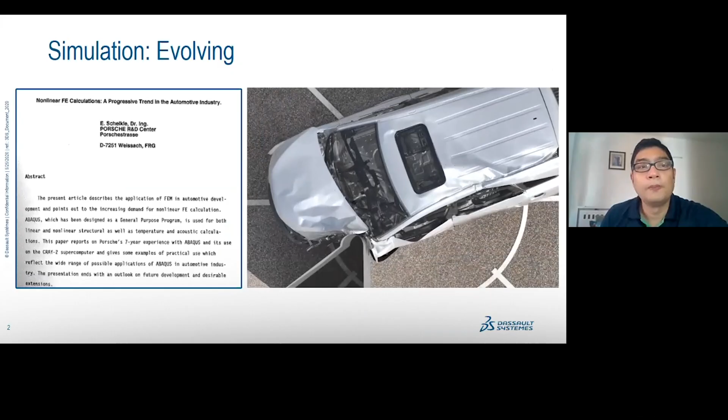We all know that simulation is not a new technology. It has been around for decades, and it has evolved so much that today we can invoke Arthur C. Clarke's famous third law: any sufficiently advanced technology is indistinguishable from magic.

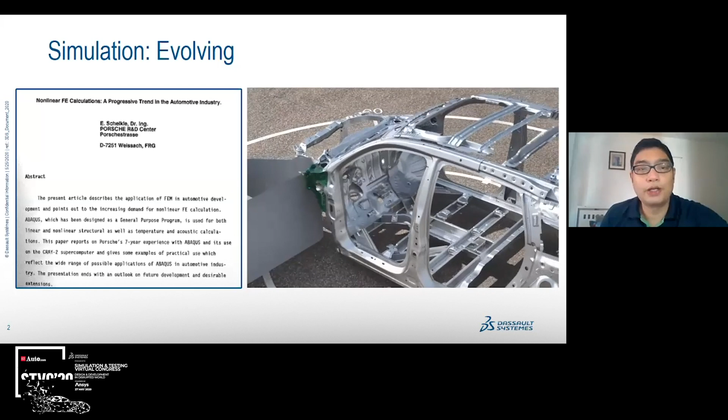On the left is a paper published by Porsche back in 1988 about their experience working on nonlinear structural simulations for 7 years on a Cray supercomputer. Porsche called this a progressive trend in the automotive industry. On the right, you're looking at a realistic rendering of simulation results from offset and side crash analysis.

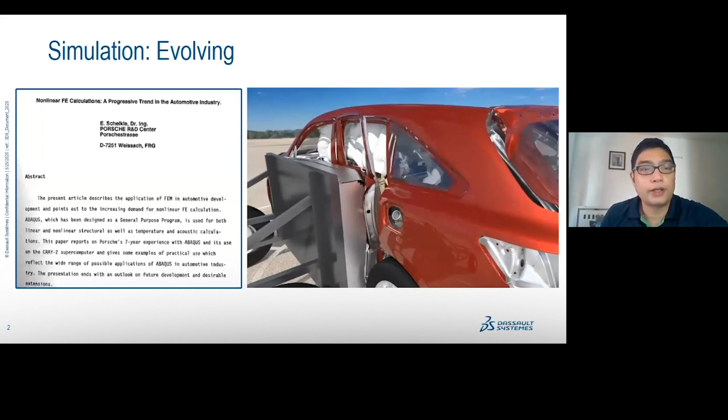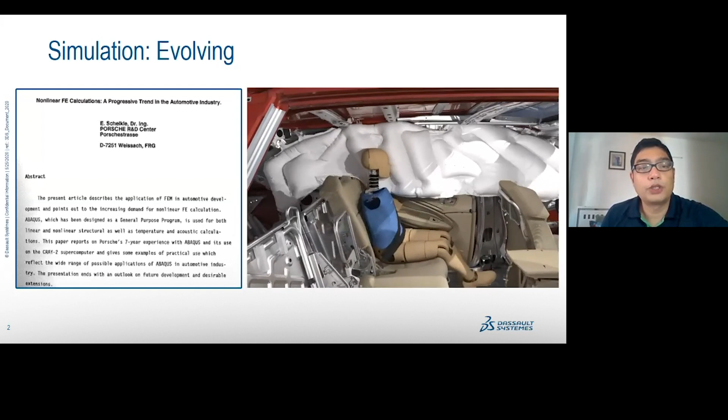The level of detail that can be captured today is nothing short of phenomenal, and this means simulation results are closer to realistic scenarios than ever before. At the same time, texts and numbers are now replaced with lifelike visualizations, which are becoming more common. When I started running simulations, I thought those colorful contours were beautiful. And now we can even look at these results in VR and AR.

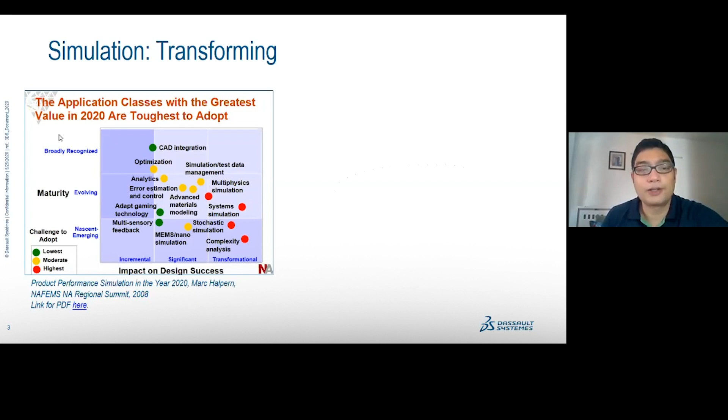In 2020, unfortunately, what we are facing is a global COVID scenario, a disruption nobody would have thought of in 2009 or even in 2019.

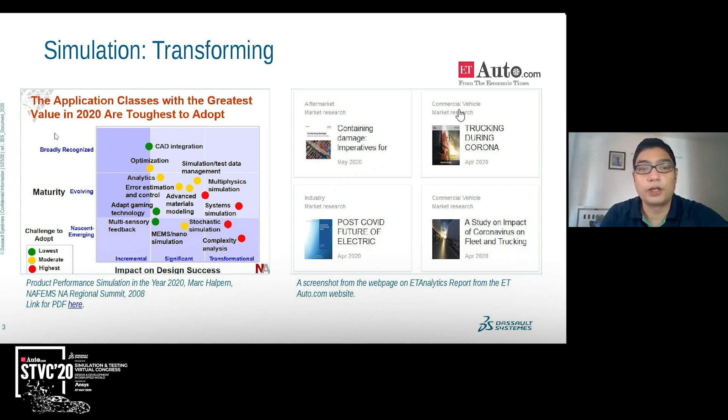So the question is, can simulation be reimagined to tackle these new challenges? Does simulation have sufficient punch to deliver business goals as against just engineering goals? The answer is yes, but before that, let us understand what we know about the value that simulation provides today.

From using simulation to understand failure, companies have largely transformed the use of simulation to predict product performance, optimize product designs for lower costs or better performance, durability, and generally reduce the number of tests and prototypes, thereby reducing overall cost. If we have to reimagine simulation, we have to expect more from it: managing complexities, sustaining confidence of consumers, and mitigating risks.

This is what I mean by simulation having sufficient punch to deliver business goals.

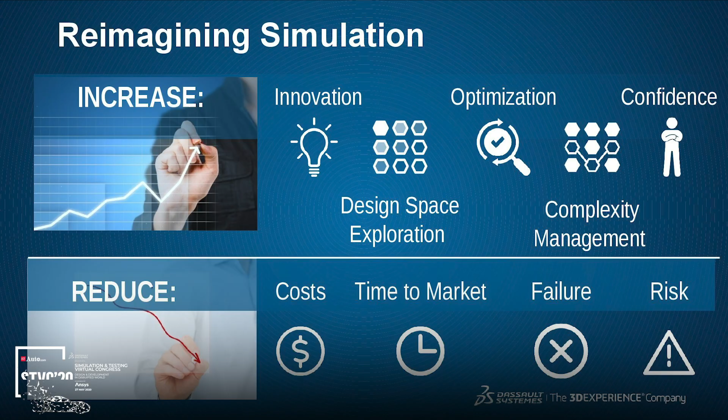Any technology goes through an S-curve of adoption, meaning that when a technology matures, smaller and smaller improvements come at greater and greater cost until it's replaced by a new technology. We've seen this with smartphones: the disappearance, replacement, and amalgamation of technologies over decades that we hold in our hands now as a smartphone. Sometime in the future we'll have other form factors, but the lockdown has made it clear that we love our smartphones the way they are right now.

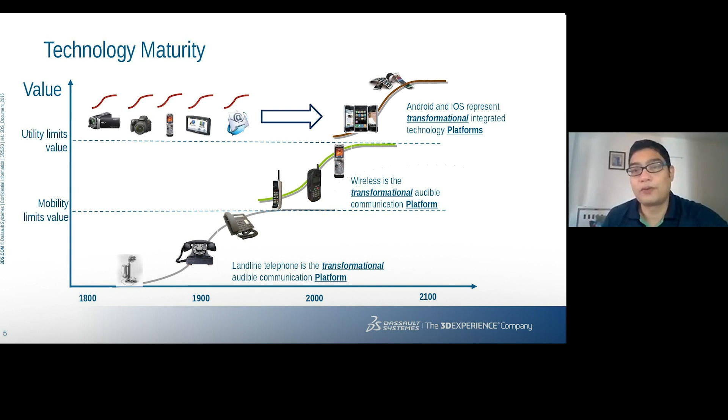Simulation ultimately is a technology too. You may ask, where is simulation on the S-curve? With simulation we have different technologies representing different physics: structural, fluid, thermal, electromagnetic, and so on, and they are all at different levels of adoption and maturity.

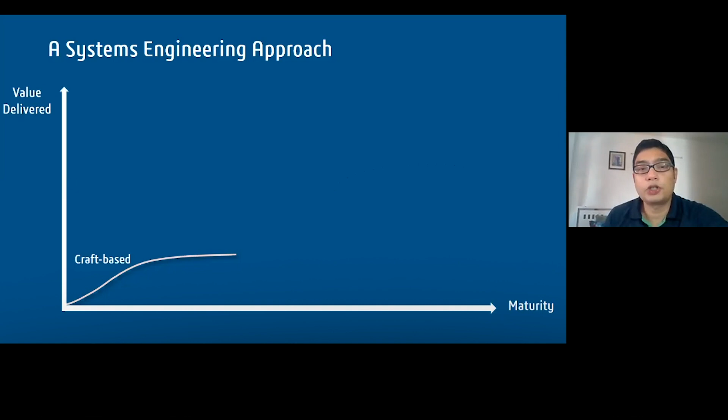However, what is clear is that all these technologies are largely driven by experts, and this is not unreasonable given the extent of understanding generally required. However, for any technology to make an impact, it's also necessary that its benefits spread across an organization. And this is exactly how left shifting of simulation started.

The use of simulation more and more upfront to figure out what could go wrong and redesign appropriately, rather than finding out why the vehicle broke down on the road.

An optimization study can provide the best possible design with minimum weight and maximum performance, but this is of little use unless it can be manufactured. A detailed vehicle dynamics analysis can provide the best possible ride and handling, but this is of little use unless the design is robust and reliable.

So we start seeing dependencies emerge all over the place. Simulations, tests, designs, manufacturing, all managed by different applications, different departments, and different stakeholders. And this is why a systems engineering approach makes sense in today's complex world.

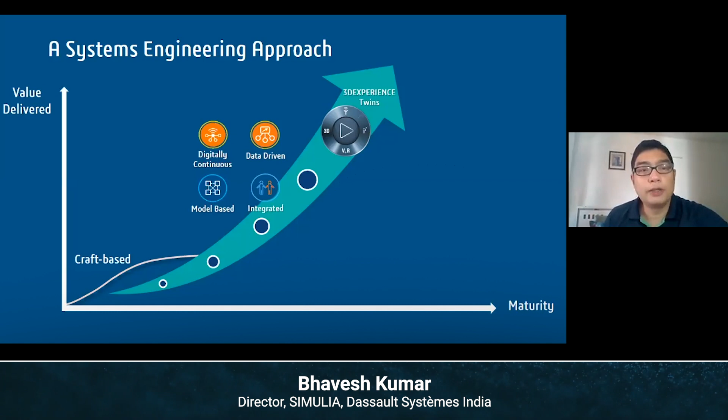If simulation has to be reimagined to provide more punch, then model-based systems engineering is the way to go. In fact, MBSE also becomes necessary for digital or virtual twin, what we in Dassault Systemes call 3D Experience Twins. The reason is that simulation pervades throughout the complete project, right from requirements to functional and logical representations, to physical models and behavior, to manufacturing, and even in-service scenarios.

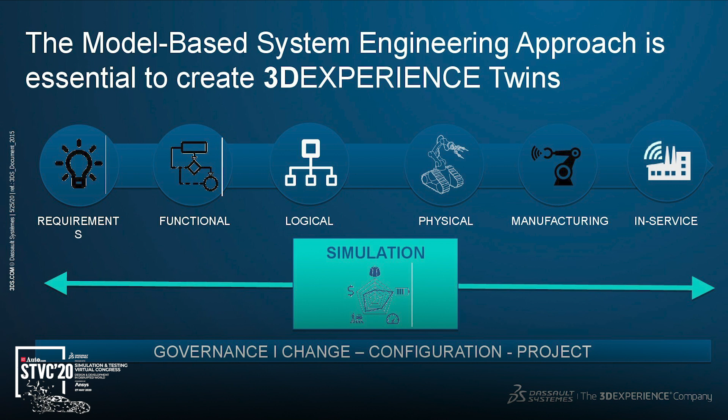With this, I would like to cover two broad areas where simulation will play a critical role and is already playing, not only in terms of performance validation, but also in terms of reduced costs.

The first is on reduced emissions, to demonstrate the increased adoption and trust in multiphysics simulations. We have had BS6, and while we have worked with many customers on pushing the boundaries of simulation for BS6, I would like to use WLTP, which replaces NEDC in Europe.

With WLTP, the challenges are twofold. The first is higher emissions reported with WLTP cycles, which are more realistic. The second is a massive increase in testing, because every vehicle variant has to be certified. After WLTP was introduced in 2018 in Europe, there has been a 24% decrease in vehicle registrations.

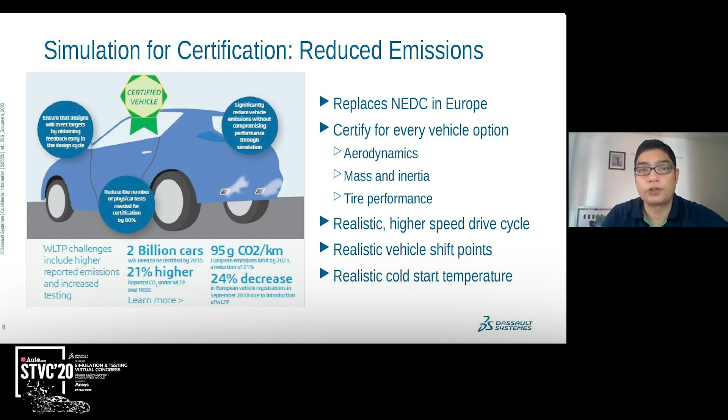WLTP, therefore, seems to be just the right challenge for simulation to be reimagined, and this is precisely what is happening. If simulation has to help in digital certification of vehicles, there are many scenarios that need to be simulated with accurate and fast multiphysics solutions: powertrain, aerodynamics, rolling resistance, and even exploring solutions through lightweighting and electrification.

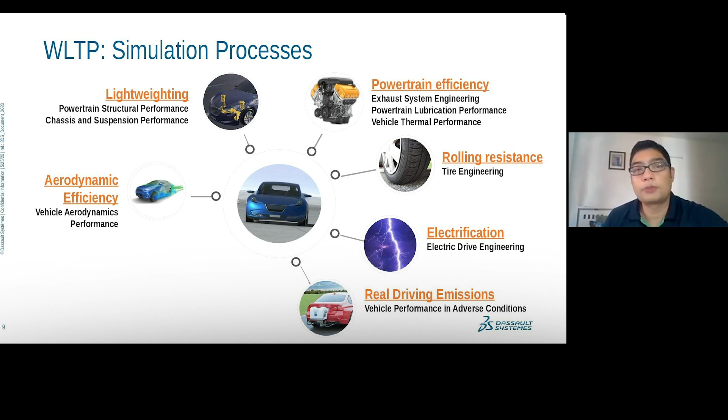I will cover just a couple of these processes. While we do not have WLTP in India, these simulation processes are currently deployed by customers in India to potentially reduce emissions. The first I would like to cover is vehicle aerodynamics, and more specifically, aerodynamics under real-world conditions.

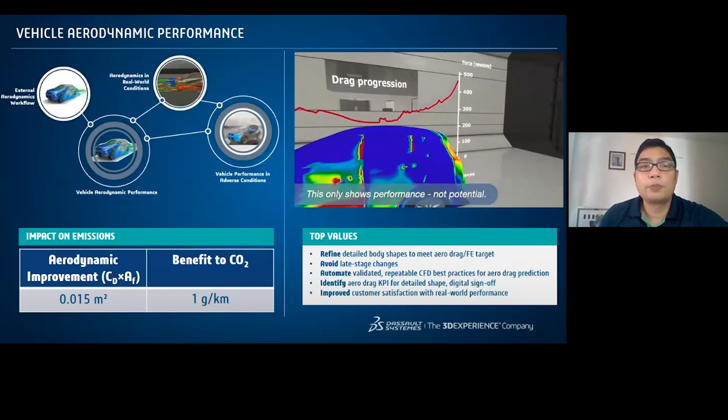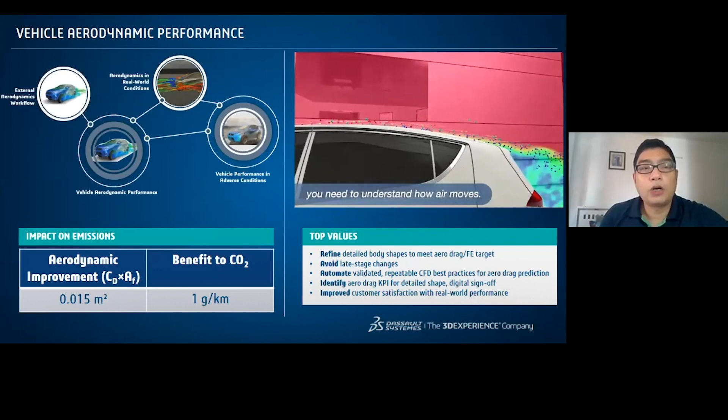Traditional aerodynamics is based on testing under wind tunnels, or sometimes simulation of what happens inside a wind tunnel. Now, fluid simulations, as we know, can be very accurate, such as the one you see here from PowerFlow, and can not only predict how air flows over different regions, but also help recommend changes that can reduce aerodynamic drag and provide better aerodynamic performance.

The video that you see here first takes us through the aerodynamics in the wind tunnel, considering how design changes can be suggested to reduce the aerodynamic drag.

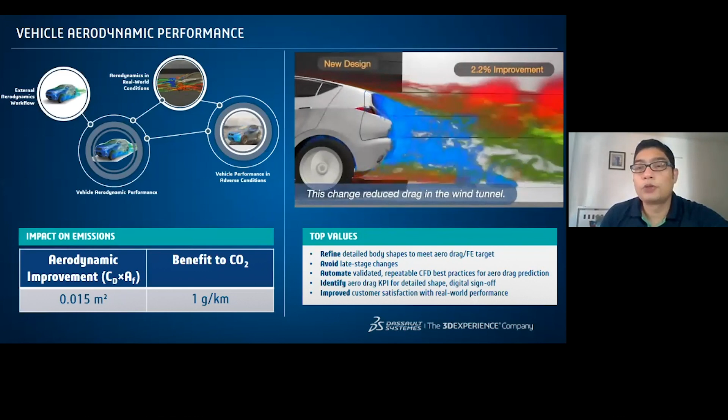So far, so good. We have seen the improvement in the wind tunnel, and the question that arises right now is how will this translate to real-life driving conditions?

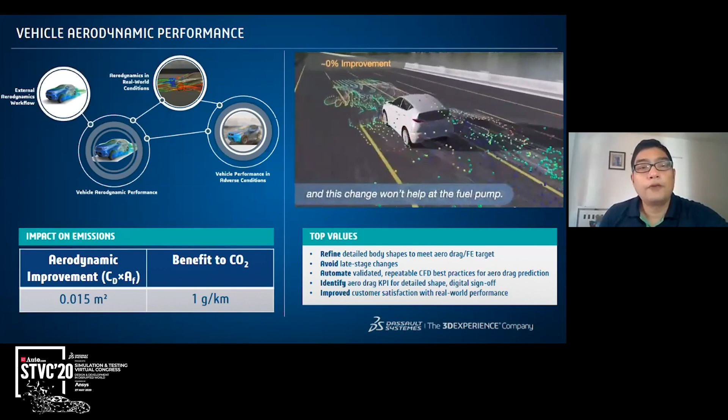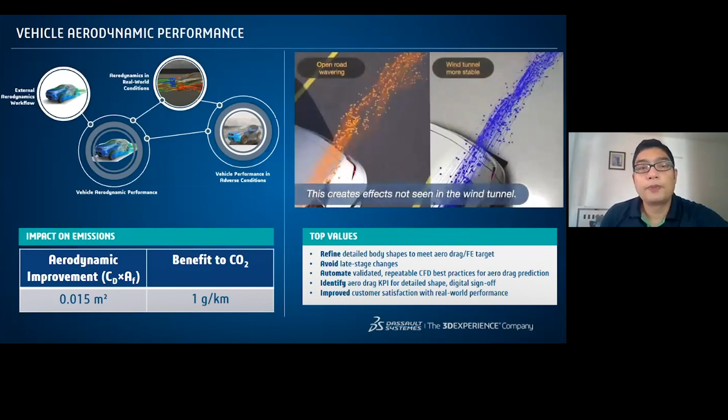First of all, real-life driving conditions are transient, not steady state, and that has to be considered for any simulation. Secondly, there is changing wind direction as well as turbulence that needs to be captured well. And thirdly, the effects of rotating tires as well as any other active devices should also be considered.

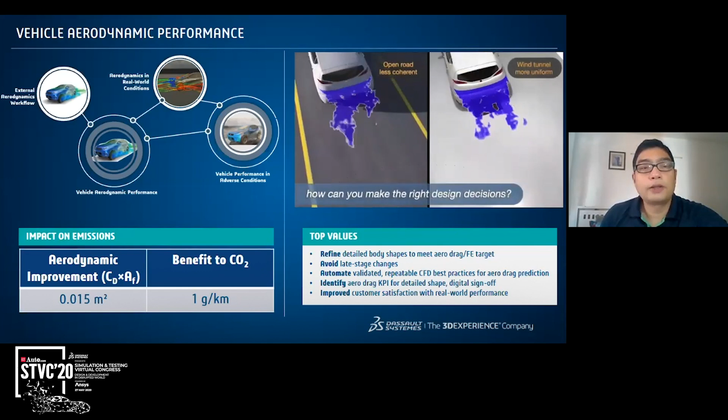So what simulation allows here is not just the ability to make decisions based on real-world performance, but also make this repeatable. The best practices for vehicle aerodynamics can be applied to any variant quickly, and this leads to much faster turnaround times through virtual validation.

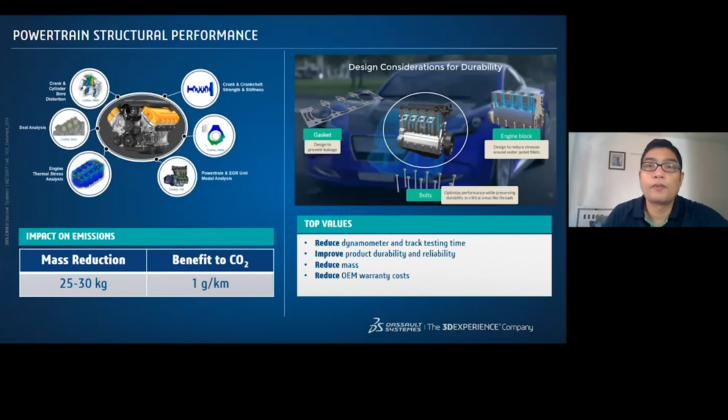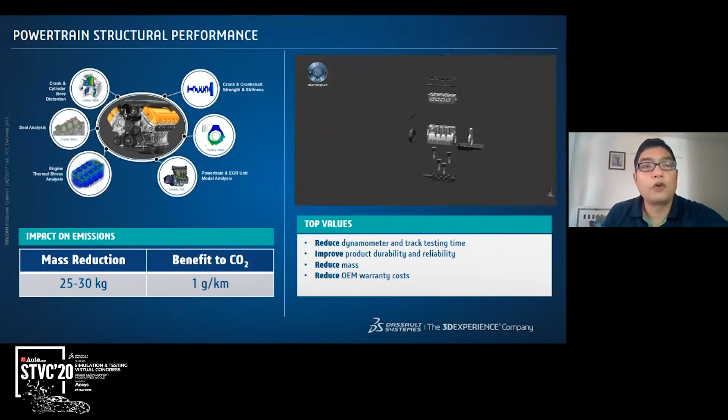The second simulation process I want to talk about is powertrain structural performance. And in fact, this is one of the oldest simulation workflows in the automotive industry. However, with increased demands on emissions and fuel efficiency, the usage of advanced simulation technology for powertrain has only increased in the last few years.

While some powertrain workflows, such as durability, have been standardized over the years, some, such as exploring lightweighting alternatives, provide more interesting challenges. One is the use of alternative materials. This introduces the classic cost performance question. Alternative materials are not just applicable to powertrain, but to pretty much all aspects of automotive design.

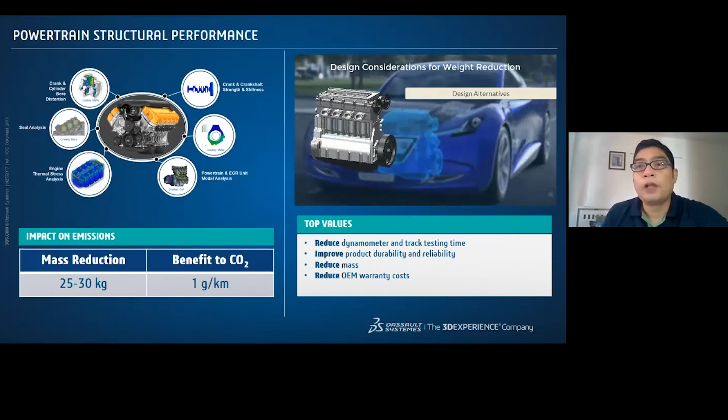And there is both the cost of material as well as the incremental cost of manufacturing, if any, that needs to be considered. Similarly, if we consider the performance part of it, it is complex too because there are multiple disciplines. And this is the reason why multidisciplinary optimization, or MDO, has been around for so many years and is in fact seeing a revival lately.

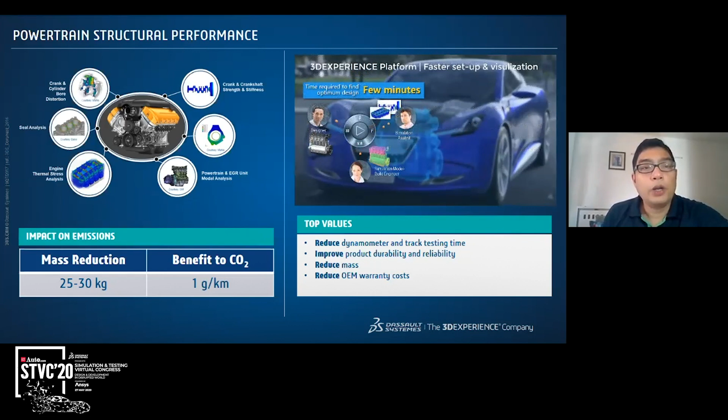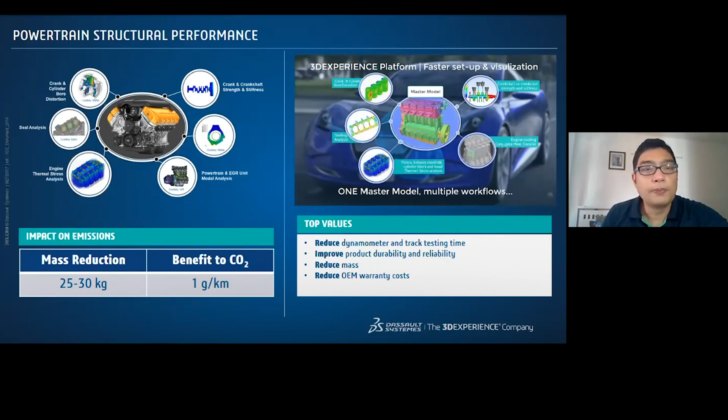However, silos between different disciplines also lead to MDO not being utilized to the fullest extent. And this is where collaborative platforms that rely on data-driven digital continuity really help. The idea is to start from a single source that can be used and reused across multiple disciplines and multiple departments to provide the best possible and the optimal design.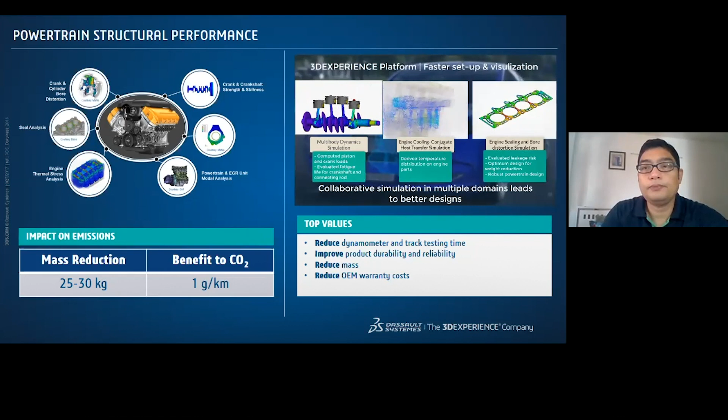So I covered simulation for reducing emissions to demonstrate multiphysics. And the second broad area I want to cover is electric drive engineering. And this is to demonstrate model-based systems engineering in action.

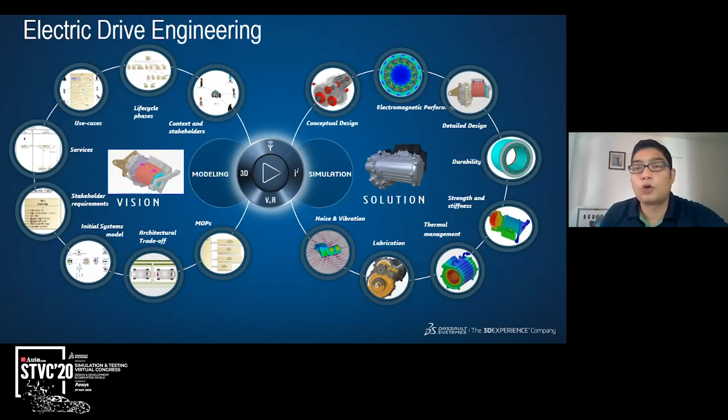Consider an electric drive. On the modeling side are a set of requirements, service conditions, use cases, context, stakeholders, and so on. And on the simulation side, there is a whole gamut of workflows to be covered, from conceptual design to detailed design. So instead of explaining all the workflows, let me just run a short video on how multiphysics and system simulation work for electric drive.

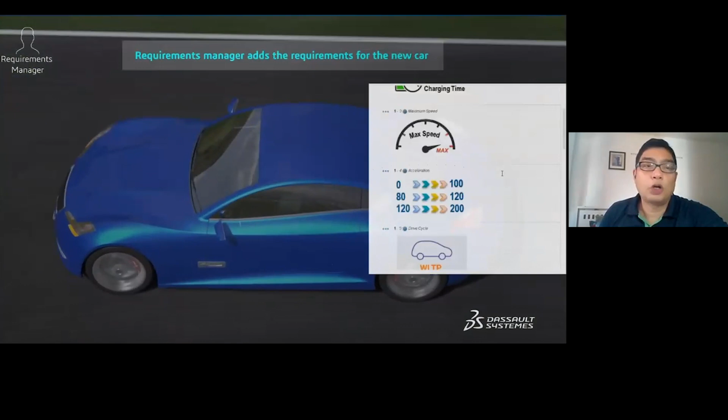We start with a broad set of requirements: the driving range, efficiency, and performance. The next step is to analyze and explore the system architecture through initial system modeling and simulation. This could involve a top-level trade-off analysis, for example, between a single drive and a dual drive, or just explore different configurations for a single drive system to come up with the best possible configuration.

In this case, we will go with a single drive system as it suits all our requirements that we had specified upfront.

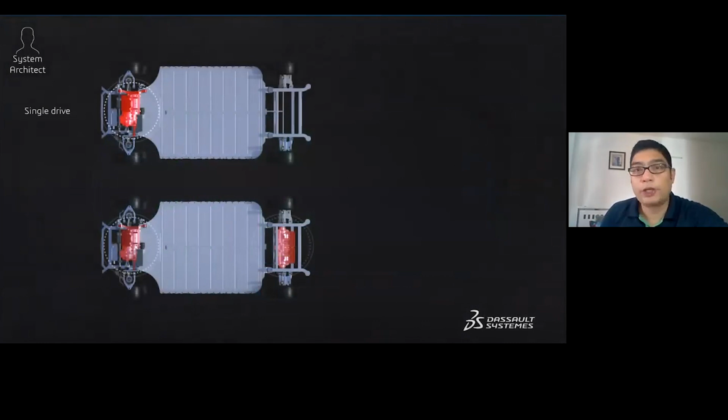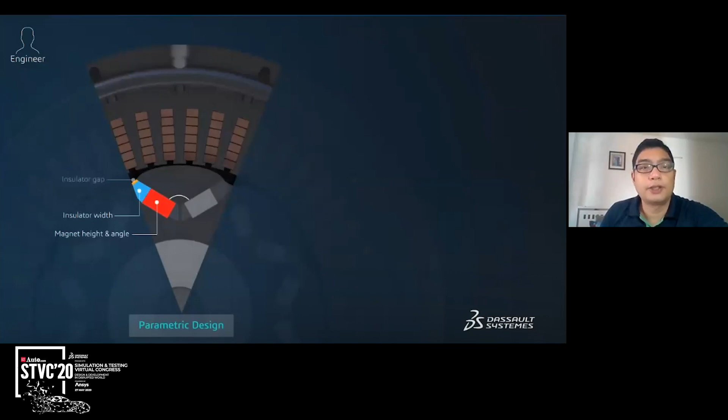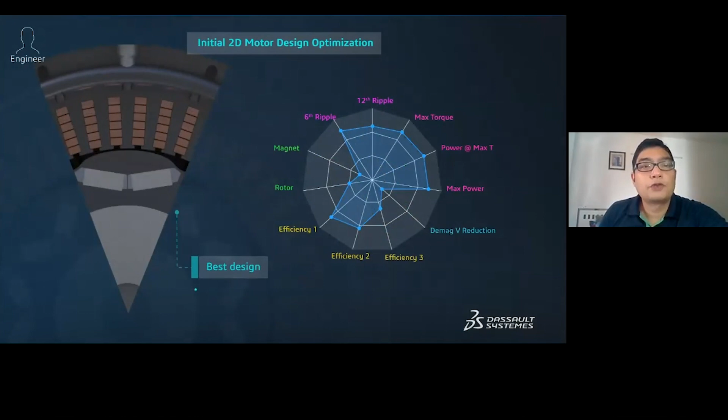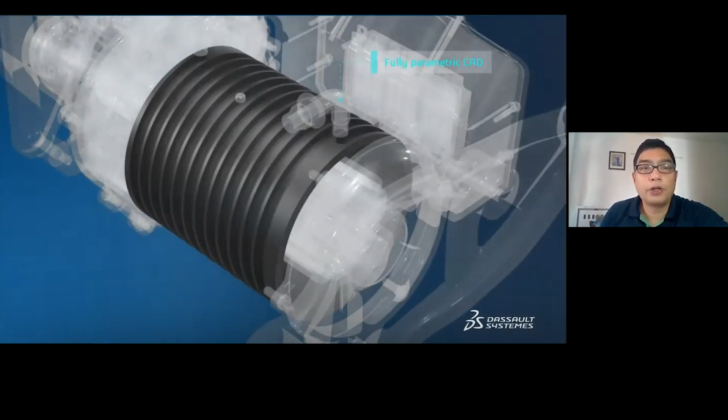Once an optimized motor design is found, further analysis could be done on a full 3D model. Once again, a fully parameterized model, which makes it easier for any what-if analysis or thermal management and structural durability to be performed. We could even look at reducing the weight of some of these components, such as support brackets, using techniques such as topology optimization, or improving the durability or life through shape optimization.

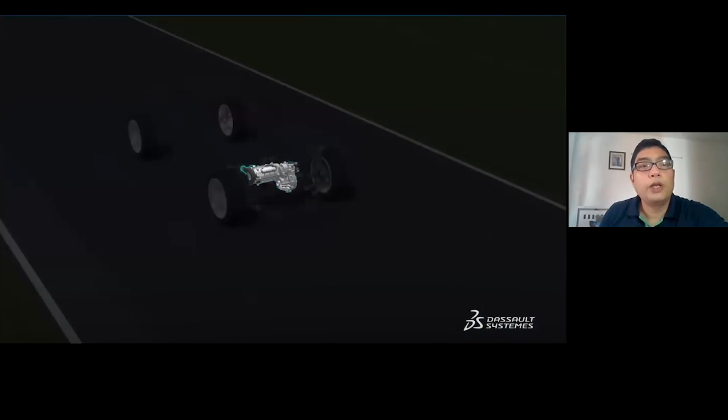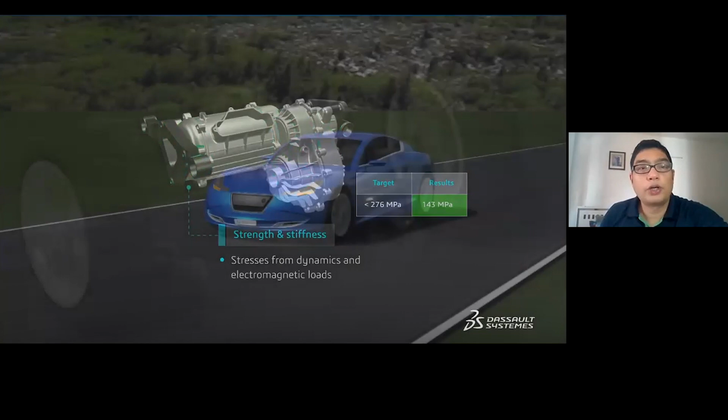So here we are seeing topology optimization being used to reduce the weight by about 18% for one of the brackets. Now that we have a good initial design, we can perform standard analysis such as structural durability to ensure that stresses are within the limits that we have defined, or a thermal analysis to ensure that there is sufficient cooling. And at any given point, we can explore design alternatives rapidly to get the better performance.

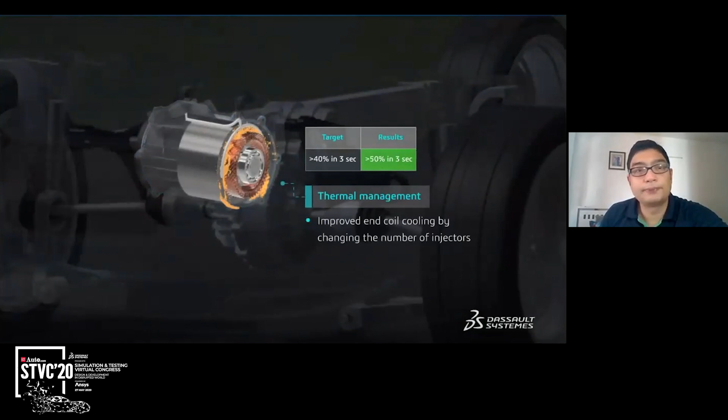So here we are looking at thermal management, optimized coolant passages that reduce the temperature, as well as looking at improved end coil cooling by changing the number of injectors. We could even look at churning losses, for example, due to gear lubrication.

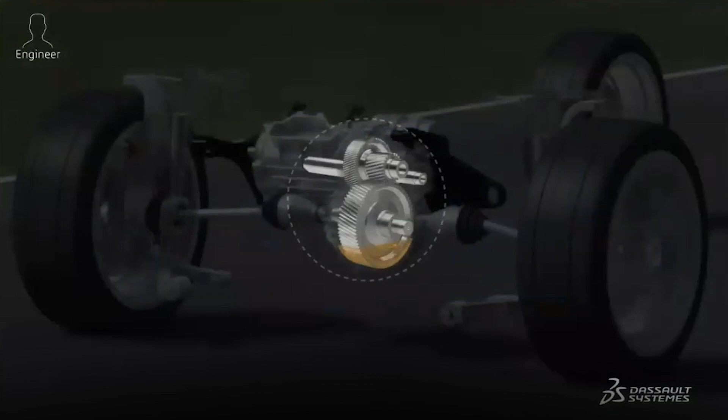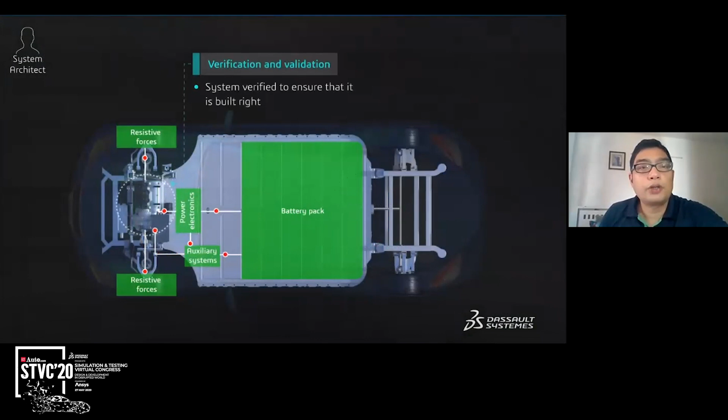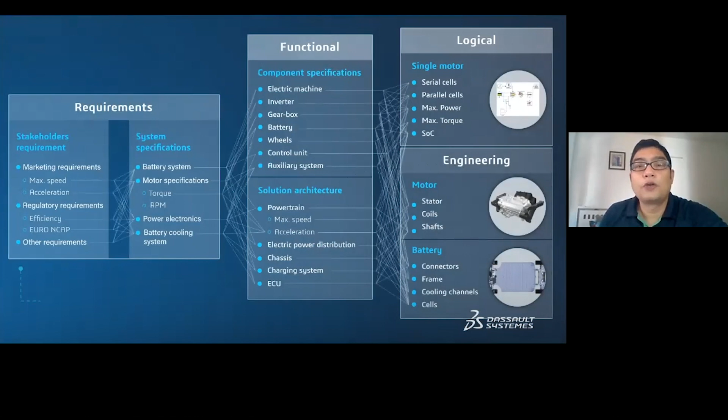Ultimately, all this information can be analyzed by the system architect to ensure that the set of initial requirements are thoroughly met. And what is more, we could even look at the traceability of each and every response and change so that we are able to link every response to the functional requirements as well as to the broad requirements that we had set at the start of our project. And this leads to an upstream and downstream visibility of parameters.

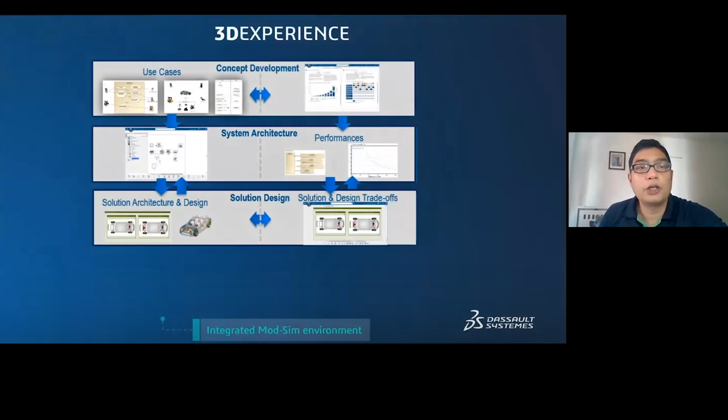So there is a framework of requirement, functional, logical, and physical simulation, which is augmented by orchestration and governance. And this establishes a digital continuity throughout, linking modeling and simulation together.

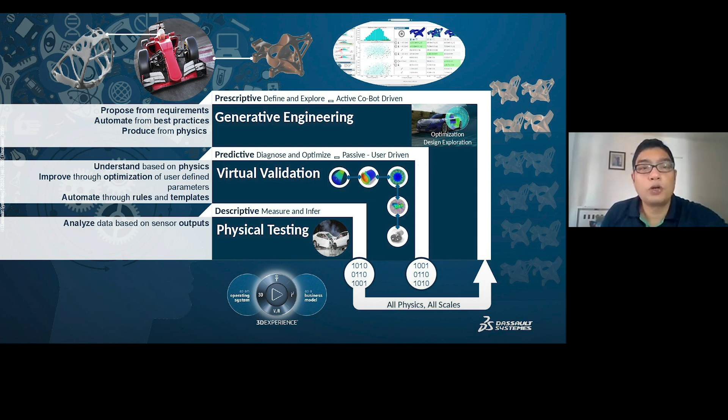So this is fundamentally what model-based systems engineering is about. In the new paradigm, virtual validation is predictive, it is automated, and it is intertwined with generative design and physical testing. Virtual validation is at the center of decision-making process, whether it is in reducing costs or improving performance. And if it is not, then it definitely should be.

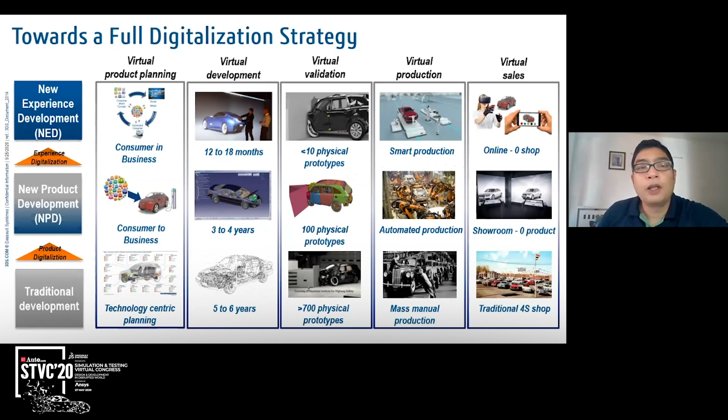I also want to touch upon another aspect here. Going digital is at the heart of many organizations today as they move from new product development to what we call the new experience development. Simulation basically is digital, it is inherently digital. Thus sometimes there is just too much of simulation that it becomes quite complex. And simulation is either left out of the digitalization strategy or is pushed to a subsequent phase of implementation. And this is precisely why model-based systems engineering is needed.

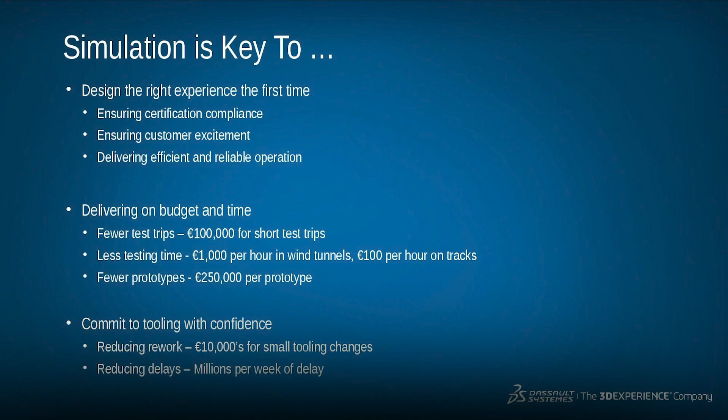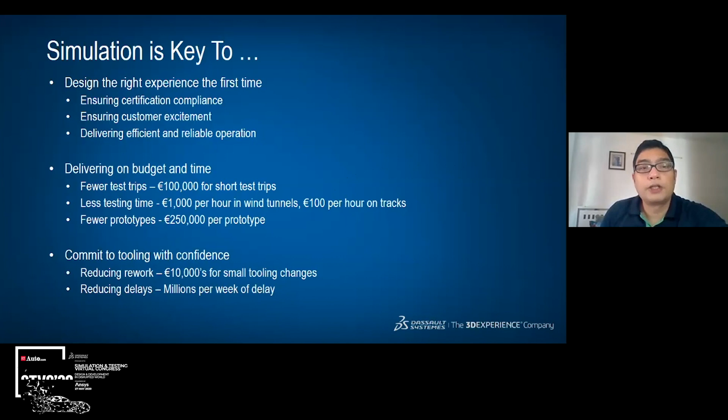Finally, if we consider from a cost perspective, based on the inputs that we have from European OEMs with whom we have worked over the years on areas such as WLTP, the cost savings go from €1,000 per hour in wind tunnels to €100,000 for shorter test trips. Of course, this assumes that we can trust the simulation results. One of the reasons why I showed the two examples, vehicle aerodynamics and powertrain durability, is to simply emphasize this. Simulation results can be trusted, and what is more, simulation results can be closer to reality.

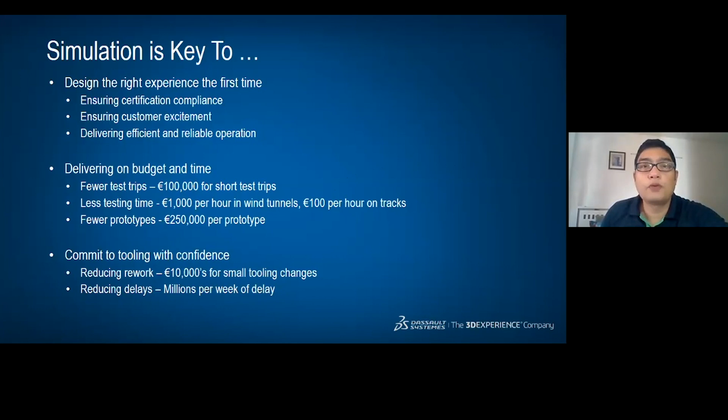Reimagining simulation is not just about application of better technology, but also about maximizing its impact to the business. In the post-COVID scenario, I only see the role of simulation increasing exponentially.